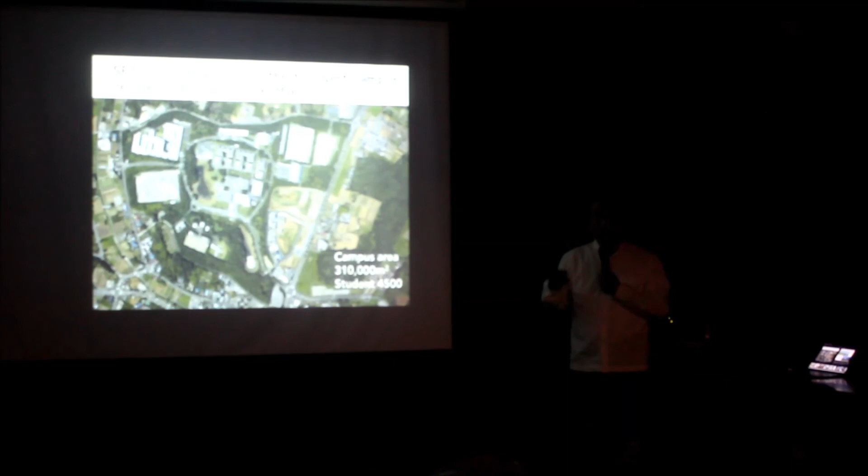Keio is very open to everything, especially our campus, Shonan Fujisawa Campus, SFC, which is quite open to the world. We set this new campus as a sort of global gateway of our Keio. This campus was designed by Fumihiko Maki in 1990, so 27 years have passed. Now we are constructing a new extension—I did not show this today because there are so many slides—called the Student Built Campus, SBC. Our students design our campus building and construct it by ourselves, made in wood, just one story, that's why it's possible. It's very exciting because the students can really be involved in designing and constructing the building.

This is Maki's design, very modern with a lot of green space. It's very nice. We have the Faculty of Environment and Information Studies, the Faculty of Policy Management, and the Graduate School of Media and Governance. My field is environmental design—urbanism, ICT, global collaboration, and some innovative implementation. And this is me.

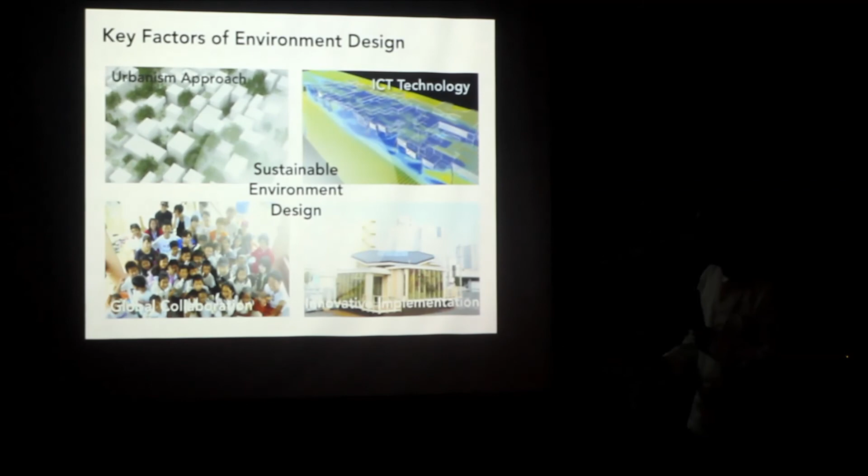I would like to introduce myself. This is Commerzbank in Frankfurt.

I was involved in designing this building under Norman Foster. It was a very exciting project. This is Tokyo-based Nikken Sekkei, a big design firm like SOM in Japan. I worked for this firm 8 years, and I was involved in Izumi Garden. Tokyo Midtown was designed by SOM—I'm representing SOM in Japan, so I was involved in this project. Our firm also designed a 10-story tenant building in Akasaka, hexagon shaped. These buildings are very exciting.

As I told you, many people are involved in one project, designing together, so collaboration is very important. But because of this complexity, we have to handle some part of the project. If you're responsible for your part and also cover other parts, maybe there's no problem. But these days, some people think, okay, this is my work, and from here it's your work, so I'm not interested in that part. That kind of attitude makes a big problem for the project.

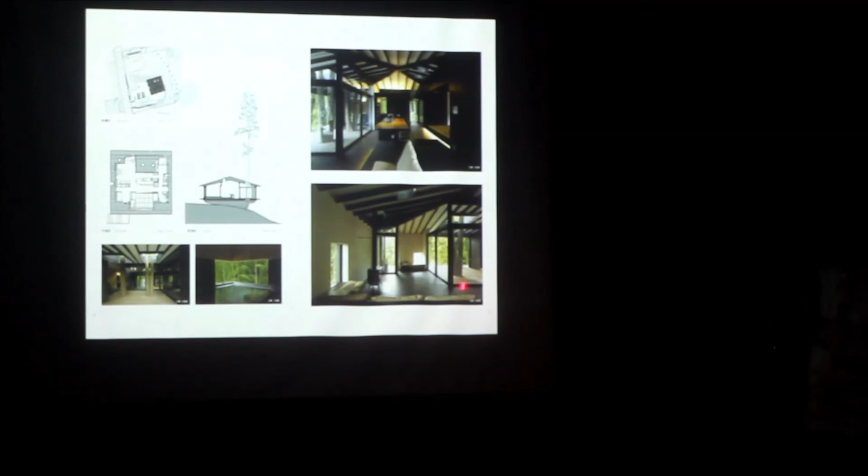Our firm also designed a small wooden weekend house. One guy bought the land, and they found the best location for the house had many trees standing there. They thought maybe they could cut the trees and put the house there. But we discussed with him that the reason people come here is to appreciate nature, so why not protect these trees? The idea is to live with the tree—so the tree penetrates the house. The plan became more complex because of the tree, but we really appreciate it. Living with nature is very important in Japan.

Six years ago, we had a big earthquake in northeast Japan. More than 20,000 people died or are still missing—a huge disaster. At that time, architects tried to help out the people there, but there was criticism of architects, because usually they get a commission, design, supervise construction, finish, and hand the building to the client. A year later, they come back and check—but people needed more help, even after completion or before design. So our team started getting involved in the community, trying to understand their needs, and trying to create a new building system to match their expectations.

At the same time, in Japan there's a particular way of understanding destruction. This is Ise Shrine, one of the oldest shrines in Japan. Very interestingly, they put a new building here, construct it, and keep it for 20 years, while there's vacant land next to it. After 20 years, they build a new building next to it and dismantle the old one, then keep that space open for 20 years. So every 20 years the building moves from here to here, and here, and here. But design-wise, it's exactly the same—the technology and process have stayed the same for more than 1,400 years.

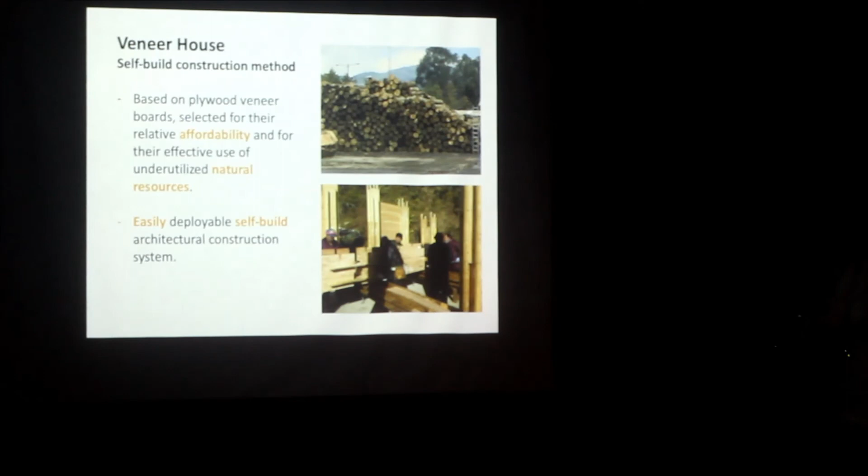At the same time, if we can introduce a self-built system, it's very helpful, especially for disaster situations, because in Tohoku, Northeast Japan, we couldn't get any carpenter. When we decided to build one community house, we waited half a year, but nobody came because everyone was occupied. So we decided to make a new system you can build by yourself - if so, you don't need a professional carpenter. So a self-built system is very helpful in that situation.

If we can use digital fabrication technology, that's also very helpful. Usually it takes forever to cut this by hand, and you need technique - that's why apprentices train under a carpenter for 5 or 7 years to do this. But if you learn how to use this machine for half a day, you can basically cut the same way. So we do not deny technology - we would like to introduce new technology, especially digital fabrication.

But most importantly, my point is that - shouldn't get closer, sorry, where's the microphone? Okay, there's a microphone, the speaker here. I should be careful.

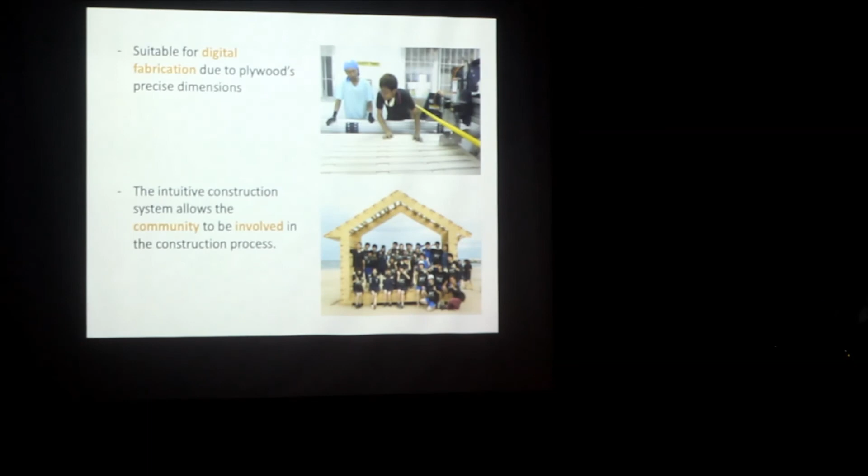Because of that heartbreaking situation, we would like to reconnect people of the society. That's why if the building process becomes that kind of moment, that would be fantastic. So we decided to use this moment to reconnect and reunite the community, the disaster-affected community. That is another purpose.

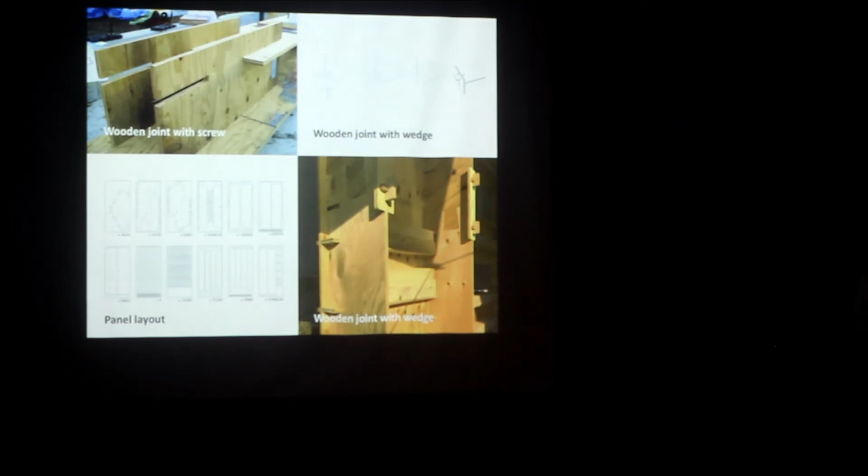So we introduced some systems to connect wood. One is cutting a notch like this and inserting the boards to make columns or beams. Another way is to use a wedge to insert and fix the joint. It's very traditional wooden joinery - we learn from the old wisdom and introduce it with new technology.

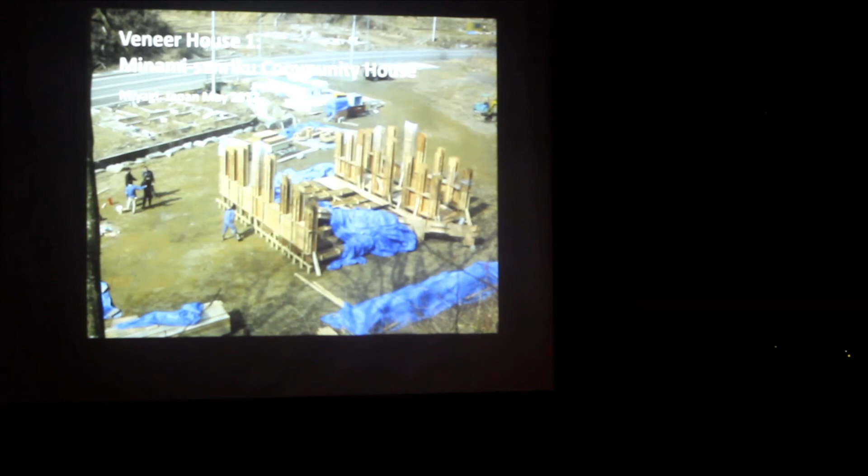The first project happened about 6 years ago - a community house, 100 square meters. We didn't have money, so we held a big party in Tokyo, and one night 900 people gathered, and we finally got $9,000 in one day. That was the biggest money I got in a day in my life. That's very nice, and students worked very hard within a very cold winter.

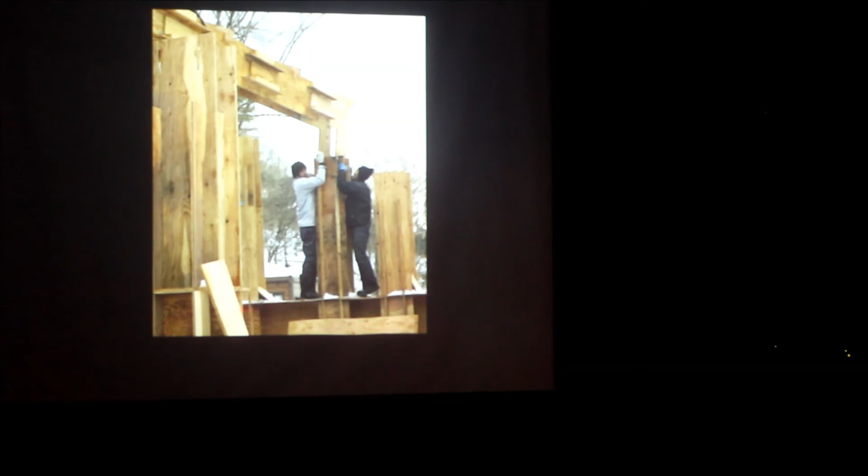Do you have snow here? No, right? You should experience this. Every weekend I went there, and we got frozen - we lost the sense of our fingers, both fingers and feet and hands. But they worked very hard, and basically we did not use much machinery - just one crane to put up the big beam.

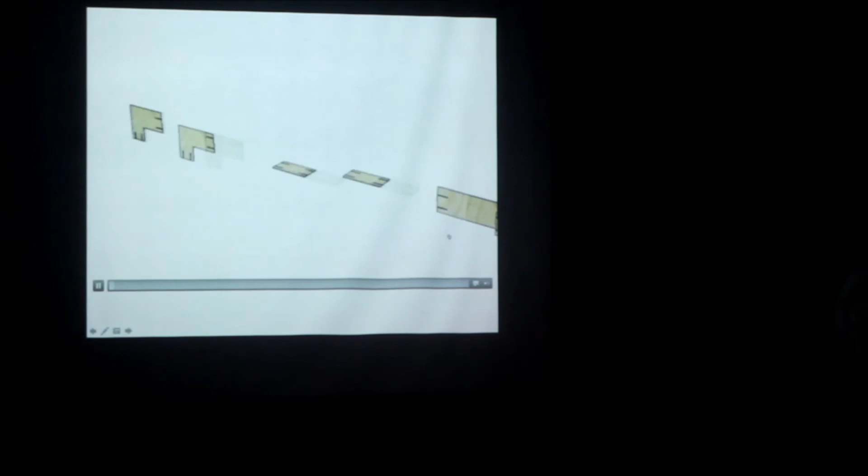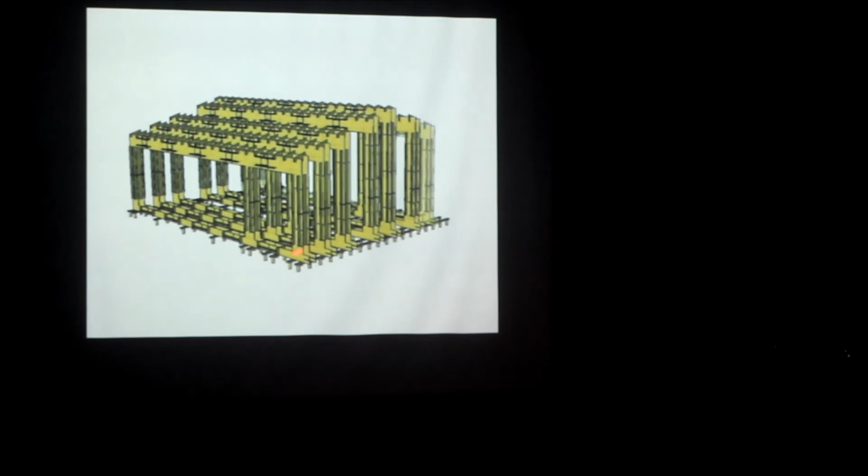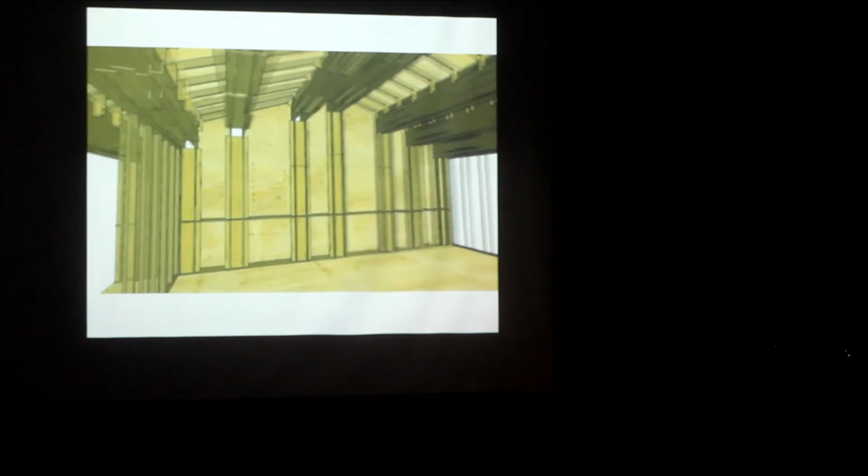So I can show you some of the process - maybe you can understand how to make this. These are the cut, pre-cut plywood, and pieces 1 through 5 all connected. This is the lower beam, and this whole project was all cut by hand - that's why there's some discrepancy, and you cannot put it together easily. But on top of the wooden foundation, we put all the structure there and connect it with the other beams, then we put in some floors - this is the actual photo where my students worked on this.

We also made doors from plywood, put in a deck, and added roof and insulation. This is the final day - it took about 2 months to finish this with the students, and on this last day they are so exhausted, but very happy.

I couldn't believe this situation—it's unbelievable. For our work, every weekend we go by night bus, Friday nights, coming back Sunday nights. We usually don't do that, but the situation there is much worse; you cannot go there. So we are very glad to work with local people and try to make a new community house for them.

We are very proud of my students, and they are very proud of themselves. So involvement and commitment is very important. This is the interior.

Because of the project, one NPO, Architecture for Humanity, which is American-based, contacted us and asked us to build another community house nearby—a fisherman's gathering space. So we decided to ask the fishermen this time to build this building, because once you can build by yourself, that would be better, of course.

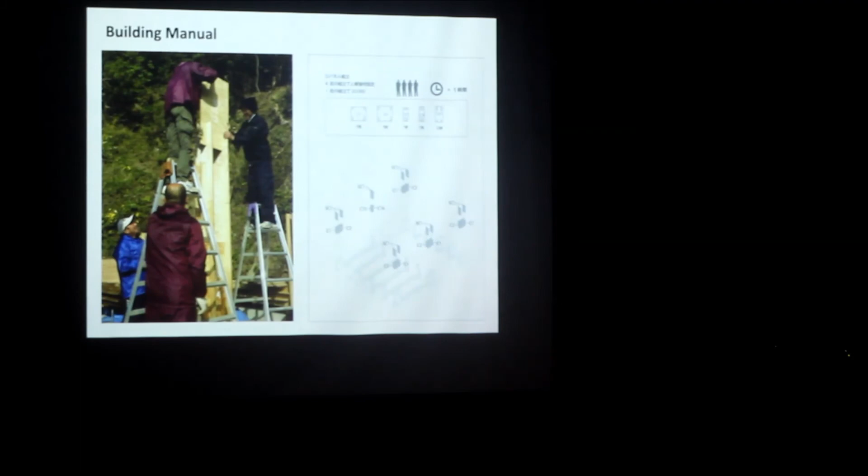The students can build, yes, that's good education. But if we build it and then give it to the users, they do not appreciate it so much. Of course they appreciate it, right? But if they can be involved, this becomes a one-to-one model, so they understand how to do it. It's easy, so they really were involved in construction.

This is two weeks' work, 40 square meters. Then we put in local bamboo woven material, because this type of hybrid is very important. The structure part, basically, we don't have to touch after we finish construction.

But the finish you have to change every maybe 7 or 8 years, and we cannot be there. That's why we should use local material—then they can maintain it themselves. And then we can also build local, light buildings.

So this is the boy. He came to the site every day. He didn't work at all, he just played. That's fine—already he was part of this project, right? And then even before the opening, he just occupied this window.

He's saying, you know, this is mine. This is very important for kids. If he can't get some place at home, he comes here every day and occupies this window—this is mine. Making his own space is very important. That's what I learned from this project.

This is the interior—something like a watermelon. On opening day, more than 50 or 60 people gathered, and we decided to take a photo. This is the balcony, and we didn't expect this many people on it.

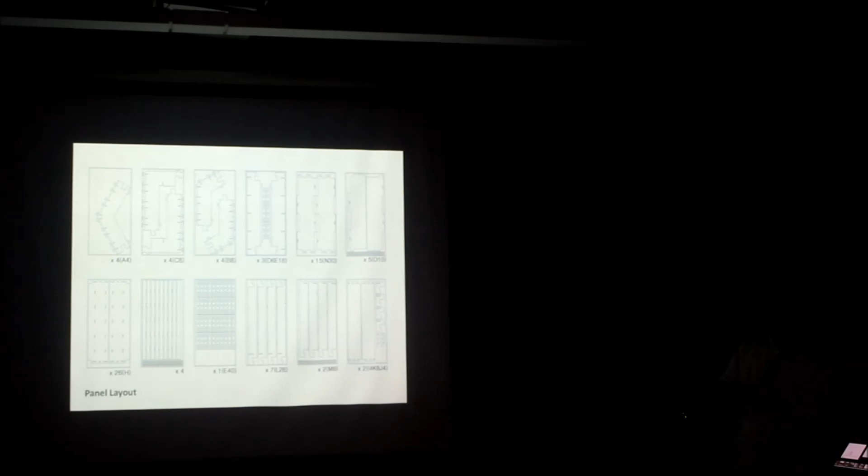So these are the layouts. We tried not to make too much waste, so these are pretty good. But here, there's some leftover piece, so we decided to make furniture using this triangle piece.

Then these are the joints, right? This is regular joinery, and we use a wedge here, right?

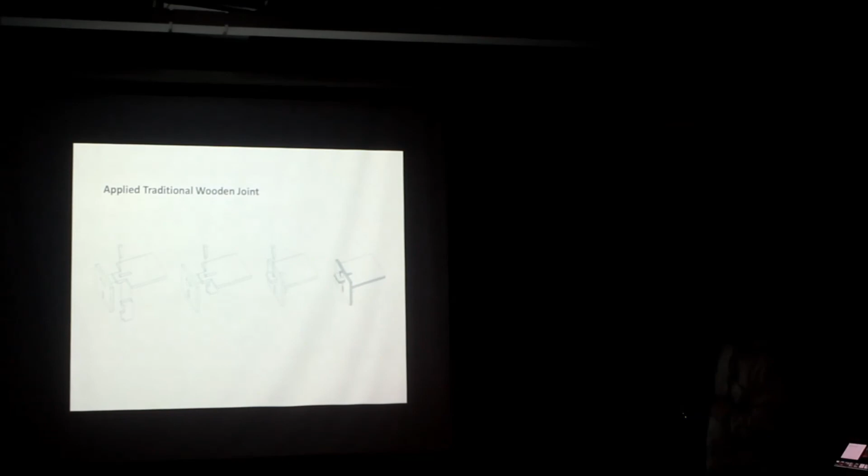Then we do the workshop again—this one younger, three years old. This is a daycare center, so the users are much younger. But we still use the same system and make a pen stand, and they make it too—so they sort of understood. Then we give some explanation, and they are so serious about it.

It's very nice, they are so serious. And they understood, definitely, at 3 years old. Right? So it's important for kids to really understand how to build a building.

Then we start to construct like this. This is the elementary school kids, and this is the actual part of the building. It's about 40 square meters, and many people came here and helped. So it took 2 days to complete the structure part in plywood.

But we put the substructure on top of that to put this bamboo finish. It took 7 days to put that substructure because we have to cut. The structure part we design and pre-cut, that's why only 2 days for construction. But then for local material we use, it takes more than 7 days.

So it's a pity because we try to make it shorter and more compact. That's why we found we have to think more about the interface between the local technology and our technology. And now it looks very local.

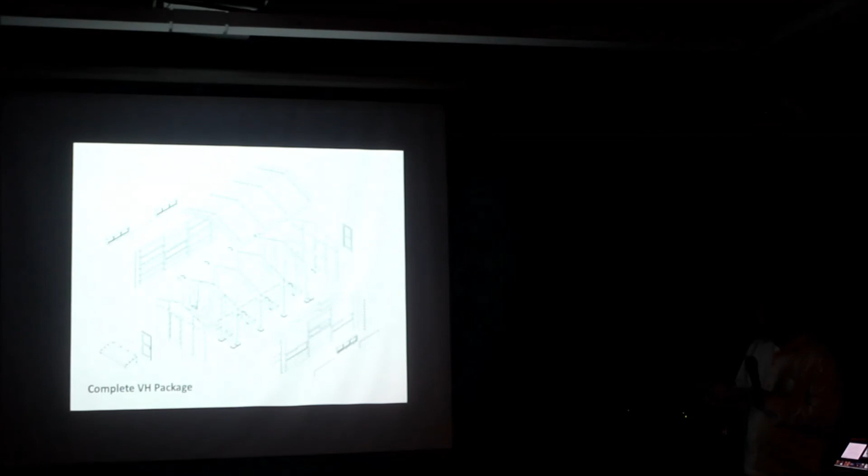Our first plan was to pre-cut the plywood in Japan, design everything in plywood, make a package, pre-cut it, put it into the container, and ship it to Nepal. That was my plan. In a 20-foot container, we could put 7 houses because it's very compact — so we can provide 7 houses at once with a small container.

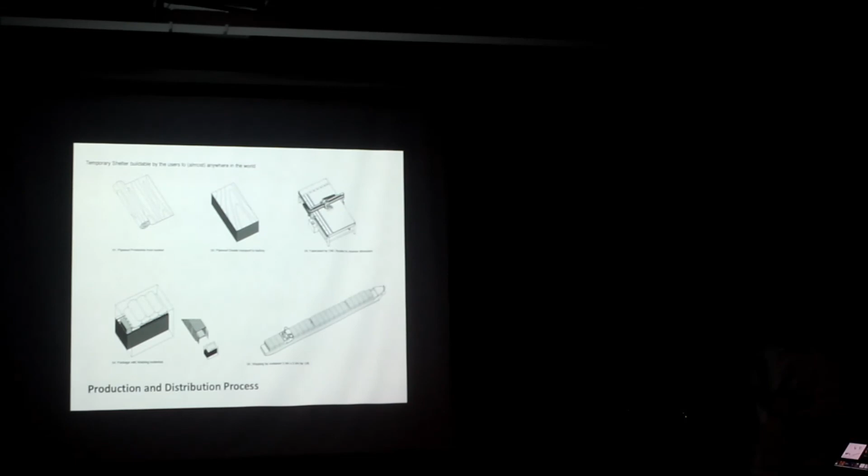But then we found that the border between India and Nepal at that time was closed — I think maybe with some political problems, 2 years ago. So nothing could pass the border. Also the situation was very hilly, the streets very narrow, and the roads very dangerous. So we gave up the idea of sending our material.

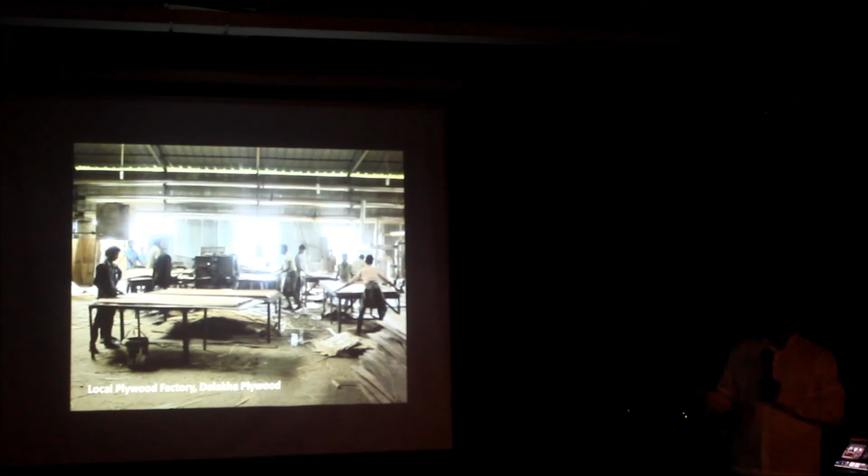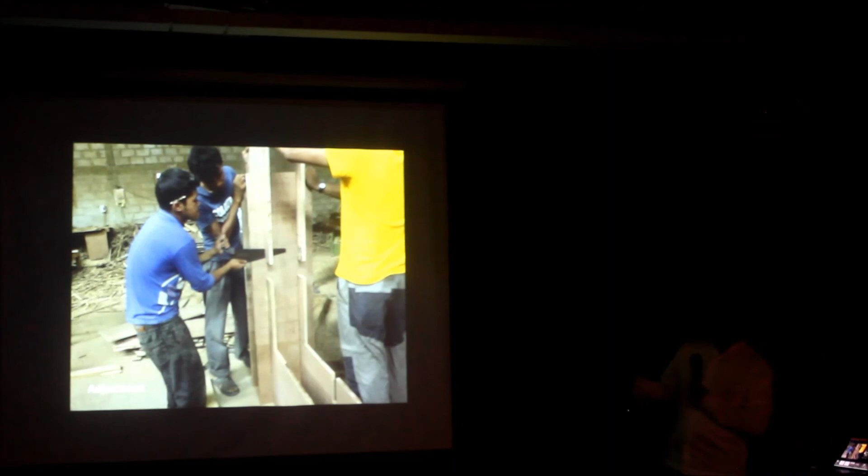Instead, we found a local plywood company that makes plywood by hand with quite good quality. They have a community forest, so they kindly offered us their factory to cut our pieces and assemble. So we used this space and worked with local people — this time, basically, we cut by hand.

So we go back to that original, very basic style. Once these guys, like 3 people, work from the beginning to the end, they know how to build this. Our idea is basically to convey our ideas on how to build a building, so they can build by themselves and spread that technique to other people.

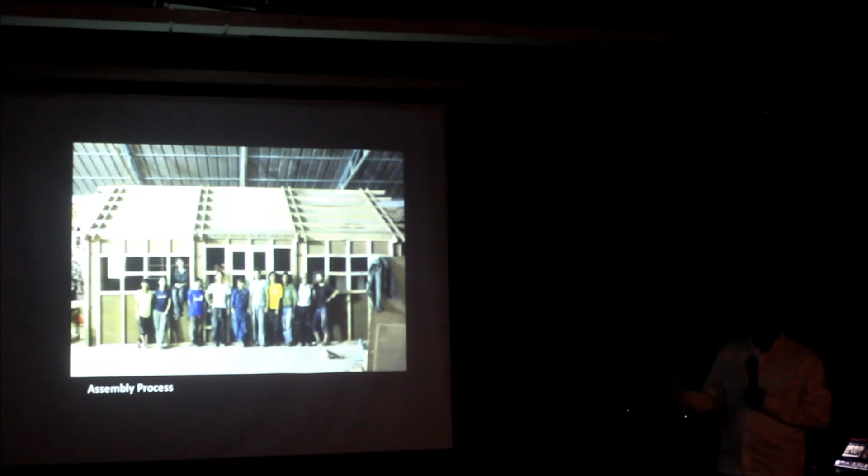We started to assemble this one, and completed the assembly. No nails yet, just assembly. Then we put all the pieces, dismantled them, moved to the site, and reassembled. This is the 3rd day at the site, so we assembled within 3 days and finished it.

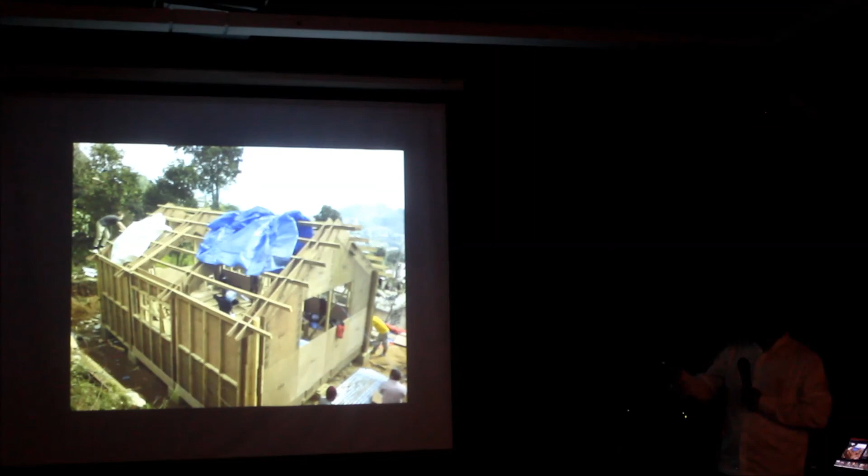This is a 24 square meter house, a model house. Now one family is living here. It's made of wood, maybe the first wooden building of its kind in Dolakha in the States.

Our intention is to make a small 3-bedroom house with plywood and shelves. This is the partition. It's a very small house, but we're very glad that one family is now living here, and he's a journalist who can report on us.

The beauty is that traditional housing uses stone, brick, or concrete, which is very heavy. But in terms of earthquakes, heavy architecture actually isn't so safe. Light architecture like this is much stronger against seismic load.

Going back to Japan, we designed a beach house for a beach that was washed away 6 years ago by tsunami. They wanted to reopen the beach, so we provided a stage for concerts and kiosks for selling beverages.

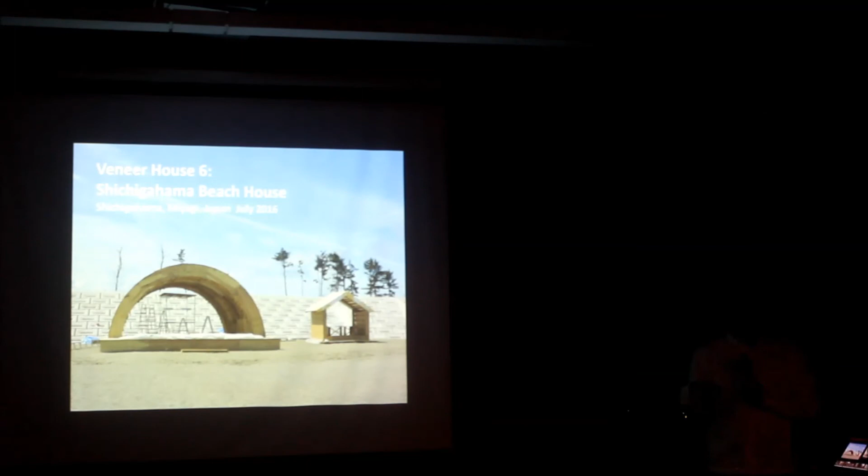Last year, at the beginning of July, I got a phone call, and they wanted something like this. So we started to design, asked the manufacturer to cut the pieces, and then constructed it. Finished on July 29th, so from design to finish was about 3 and a half weeks.

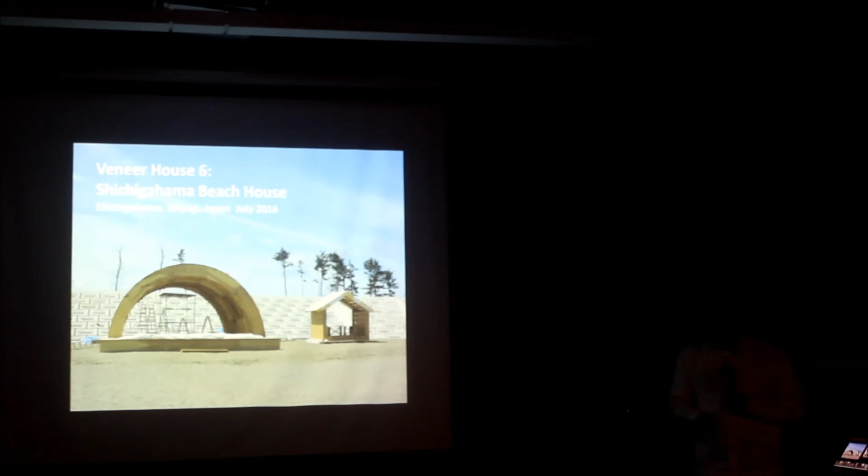That was the fastest, it was crazy. We were so tired, and the students were so exhausted. But then we completed this system.

To do that, we had to invent a new joinery system that doesn't have a knot here. Usually a joinery system has a knot here, right? But this one, because of the peg and the way it stops in the middle of the board, we can make a flush finish. Because of that, we can put the membrane on top. If you have a knot like this, you cannot put that membrane. So this flush joint works pretty well for this type of building.

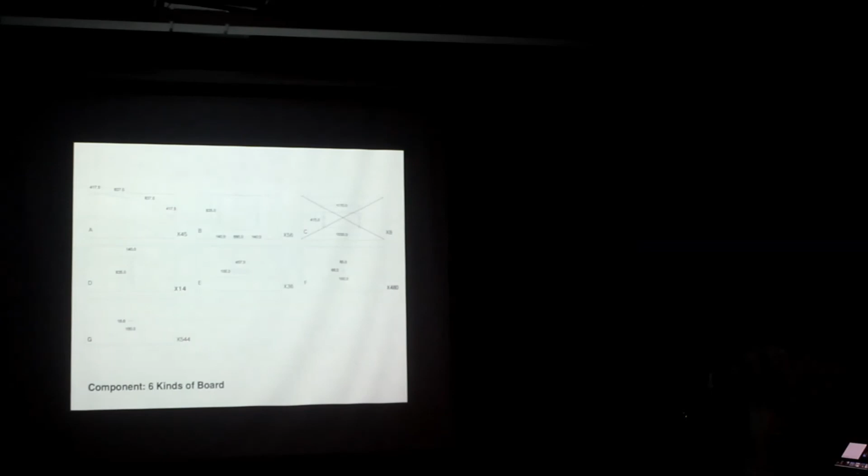The beauty of this building is that, for our first building, we had more than 100 kinds of pieces, and we made many mistakes because they were very similar. For this one, which is just 6 square meters, only 6 kinds of pieces make the building. It's very simple, so if some part is damaged, you can replace it with these pieces. You can just cut some pieces and keep them stocked in a warehouse, because you can repeat these. Repetition really makes things very simple.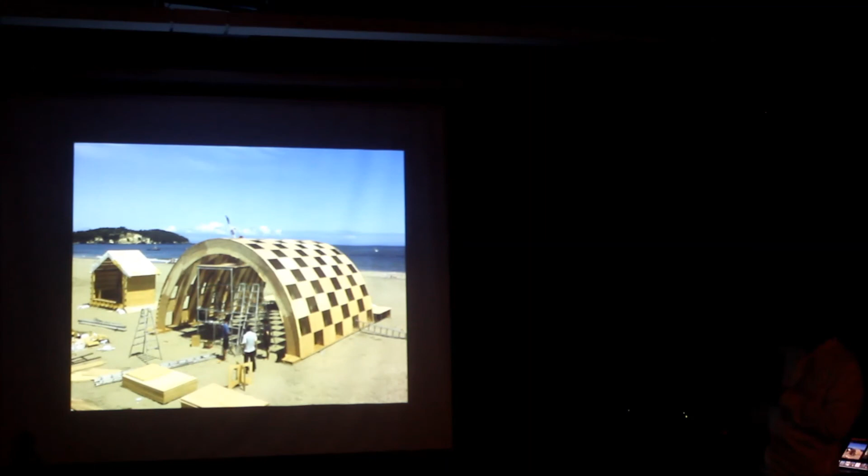Then we put the membrane on top and made a stage. Here's the crazy day they are enjoying concerts. It's a very happy moment because after 6 years, finally they could reopen the beach. High school students also assembled the kiosks there, and they really enjoyed it.

These students came back this year too, and built more. Now we have a total of 11 kiosks selling things. So high school students are also welcome to be involved in this project.

After this, one guy contacted us and said that in summer, people at the beach have summer houses only for 2 months. But when they disassemble the beach house, the carpenters throw all the nails onto the beach and go back. So you can find tons of nails in the fall, and it's very dangerous.

That's why one NPO that cleans the beach asked us to design a non-nail cleaning house. If we don't use nails or screws, of course it's safer. So this is a non-nail beach house.

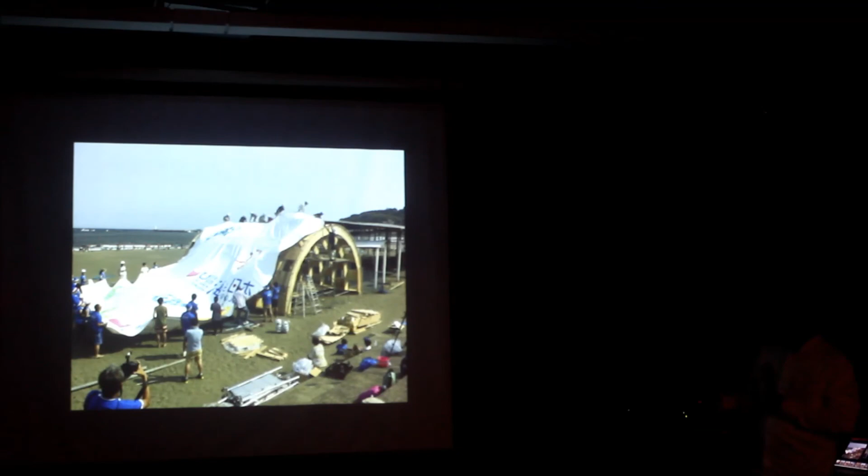There's a small house inside, and this one was dismantled last week. So next year, at the beginning of summer, they assemble it again, keep it for two months, and then dismantle it again. So it lasts maybe 4 or 5 years.

Fortunately, this beach is the venue for the Olympic Games 2020 in Japan for yachting, so this can be a sort of building which can be seen on TV.

We went to Croatia just last year to make this one, which is the only wooden building on this island. My idea is that, as you know, in Europe now they have a lot of immigrants from the South, from Africa, from Syria, but they have problems providing houses for them. So the idea is to provide a very simple temporary refugee house, an immigrant's house.

This time, Milano Politecnico helped us—that's why they provided plywood for us. So we used the plywood, and then we moved to...

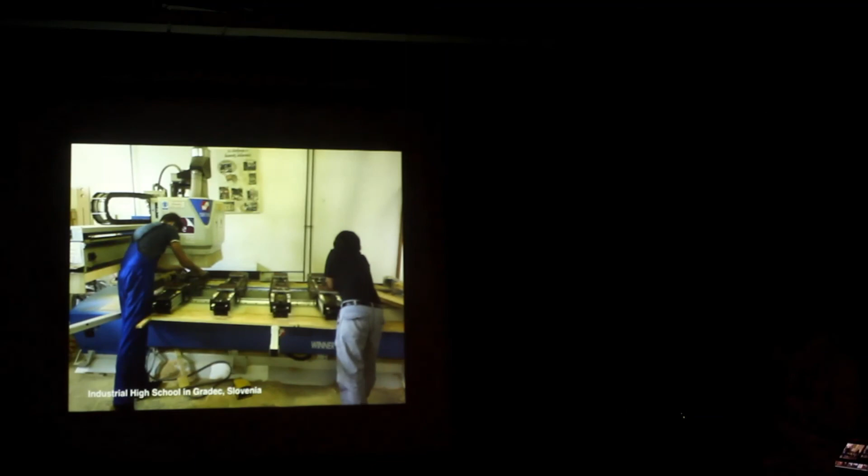That is our idea. So this is our trial, and here's the CNC router. We cut it, and then we provided the house—a very small 16 square meter tea house.

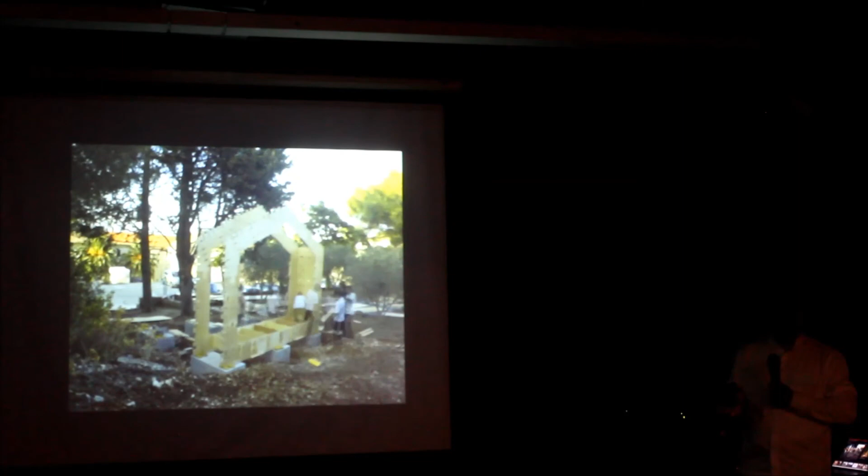The mayor wanted to introduce some Japanese culture—he's a judo player, and Croatia is very, very strong in judo. So he wanted to introduce some Japanese culture.

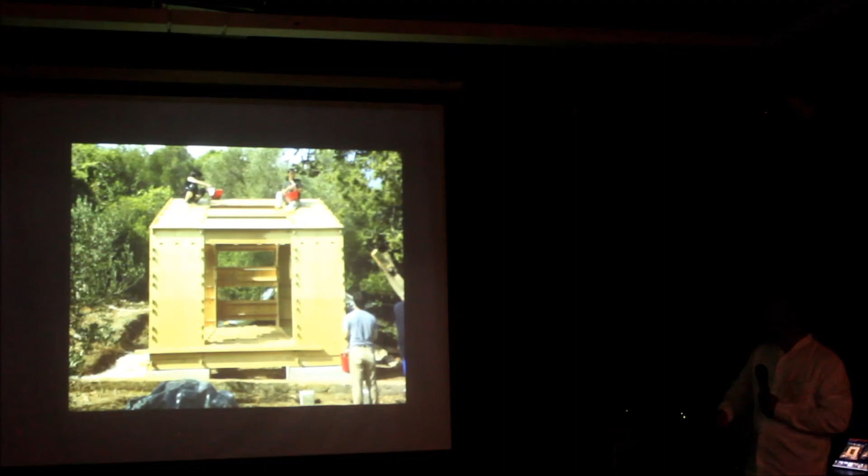So our intention was to provide a sort of prototype of a small house, and we made this one into a tea house. This is the structure, but eventually we had a tea house like this.

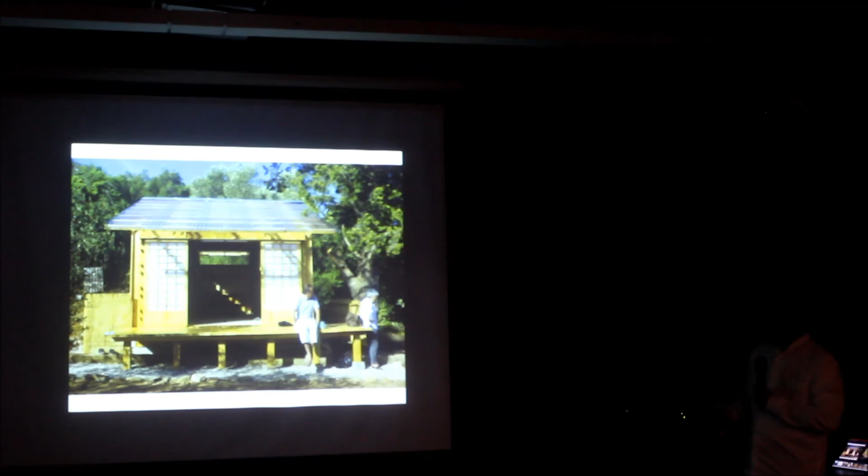I brought the paper myself from Japan because we couldn't get paper there. This is a very Japanese sort of tea house—we are providing tea, and it's very tough. So it's a tea house.

I'm old enough to just survive, but you guys, be careful and also be prepared, please. So I try to be involved in this type of situation and try to help out, but with some new ideas.

This is Kumamoto, southern Japan. An earthquake happened, and people actually cannot live there, but they cannot leave their house behind because all their belongings are there, so they have to stay nearby.

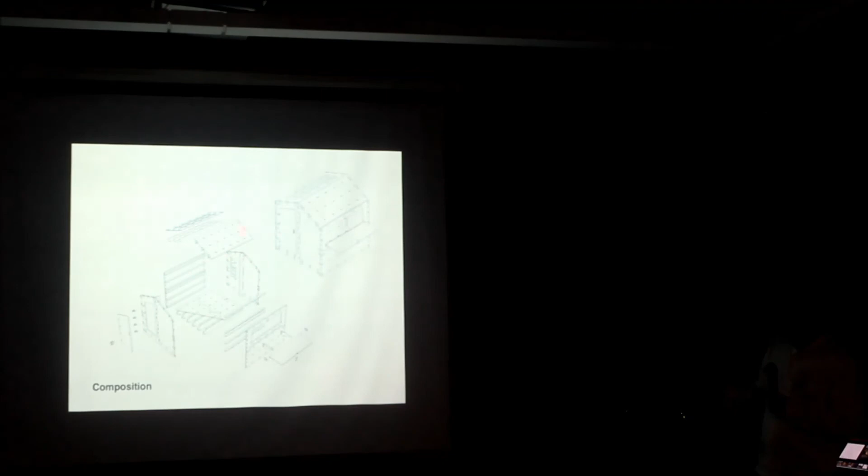So our idea is to provide a small house instead of a camping tent. The tent, of course, works, but it's very hard to stay in. So our idea is to provide a very simple plywood house, about 6 square meters, made of 18 boards. Here's the one.

This is less than 10 square meters, so we don't need any permission from the government. That's also why we put casters here—this is not architecture. So the government says, okay, you can just use it. This is a simple one, and 3 people can safely stay and sleep here.

Then another way of using it is as a vendor or like a tea house. So we are now pursuing this direction—a smaller, simpler construction veneer house.

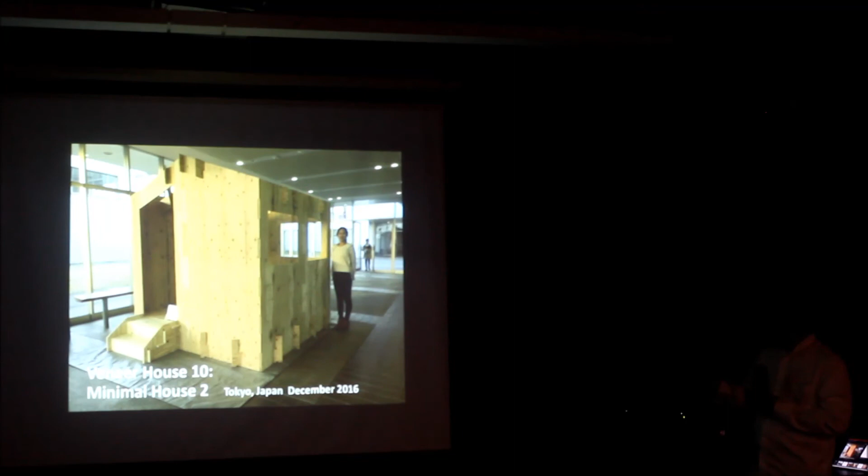This is the second version, which is much simpler, because for this one we don't even use a wedge. We provide a structure at the bottom, push the wall into the structure, then put the top structure on—then it's fixed. Here's the layout: total 14 sheets, 4 by 8 feet.

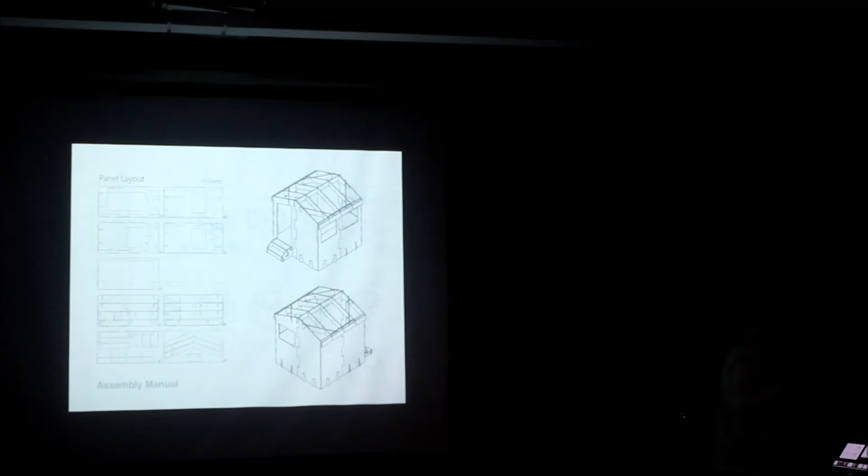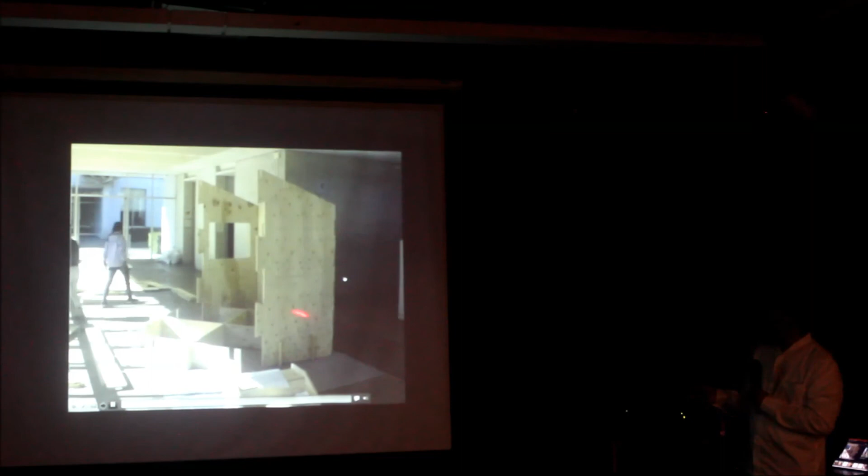Here is the manual we provided. It takes about 45 minutes to construct. First we put the structure here, diagonal, and then put this wall into that structure, then the floor here, and then the ceiling structure. Then we put the membrane and tighten it, so everything's fixed. It's 14 boards. In Japan, the material cost is about $500 US dollars, and it takes 45 minutes.

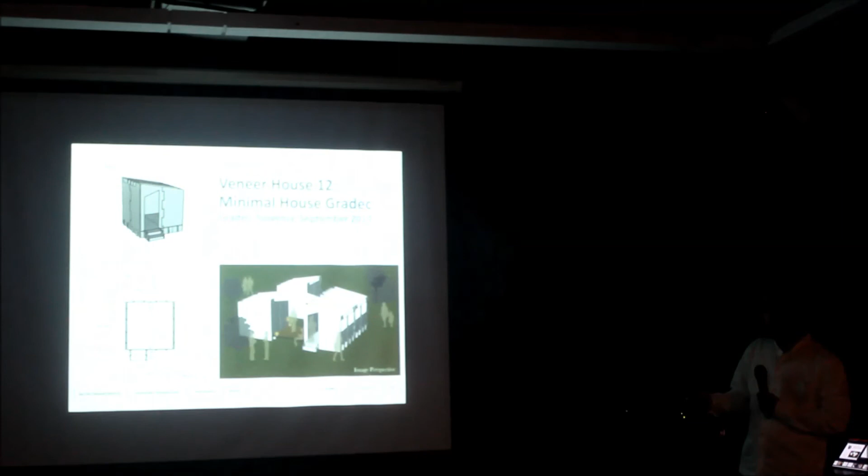So it's very simple. We are now providing a house like this in Slovenia for immigrants. In this case we are trying to make 3 booths: 1, 2, 3, where 2 are connected and 1 is separated. We can make a sort of space in between.

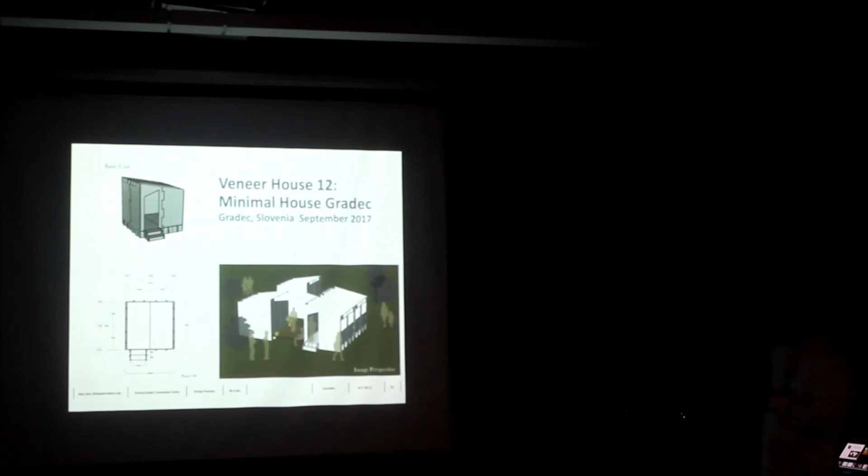Here's the 1 to 10 model, and these are the pieces. It's very simple, and finishes like this.

Again, if you are involved in this type of project, you can feel that architecture can be much simpler. Of course, you can go to more complex work after that, but at the same time, anytime you can come back to the simplicity. It's like Mac computer—Steve Jobs said, think different. He wanted to return to that world with a very simple idea.

So I would like to think about architecture again—maybe a lot of complexity, many things you have to learn. But you can also think very simply, and try to make the distance between the architecture and you smaller.

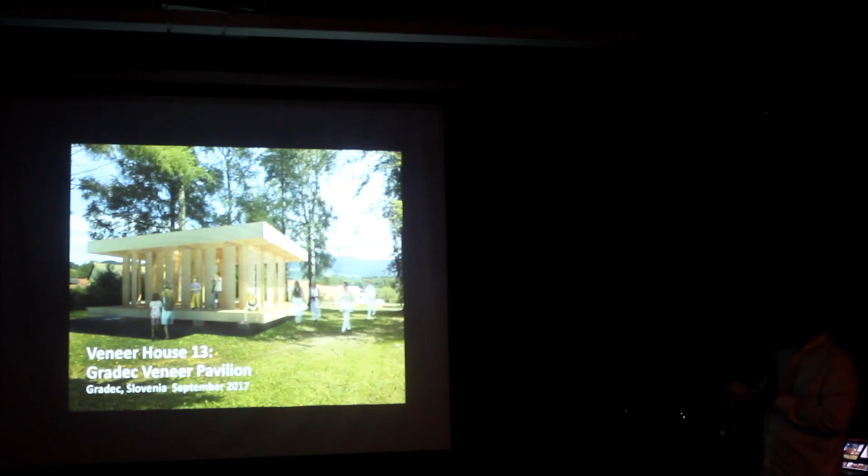So we are now building this building in Slovenia, under construction. This year we decided to build a small refugee house and also a community house in Slovenia for Gradec. Here it's more like a Mies van der Rohe type—a flat surface, very translucent, transparent space in between. The system is a square with 12 columns, and you can have open space inside.

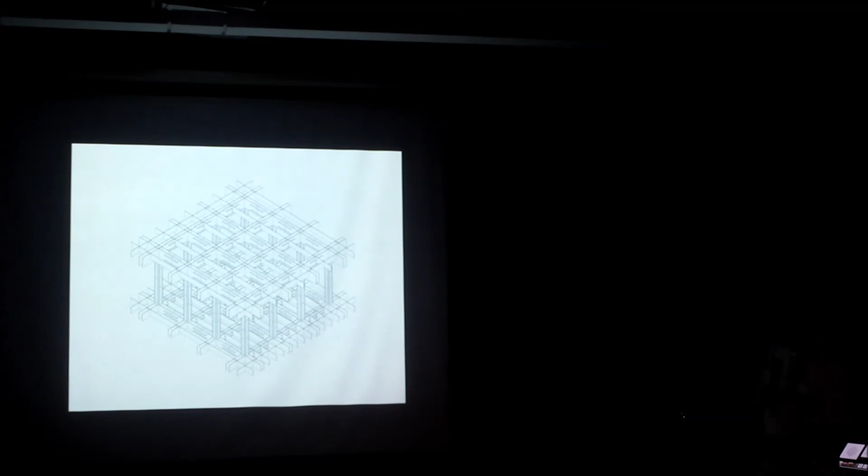This is from 4 days ago, and I go back after India. I go back to the site and work on this project, and it will be completed September 16th.

So we are now working in several places. Started from Japan, of course, but then other places. This year we go to Accumoli near Amatrice in Italy—they had an earthquake again last year. Also, even in the States we may have projects because there are many homeless people there. That's another issue, but they need houses. So a simple house can be helpful for a lot of people.

That's the last. Thank you very much.

Does anybody have any questions?

I have a question to ask you. What has the shift been like for you, moving from really large projects which you worked on with Norman Foster or Nikken Sekkei, or later with SOM? It's a kind of big, bad world of construction, right? And then you move to a scale which is very intimate and personal in some sense. Why this choice to shift to something smaller, and what has that journey been like for you?

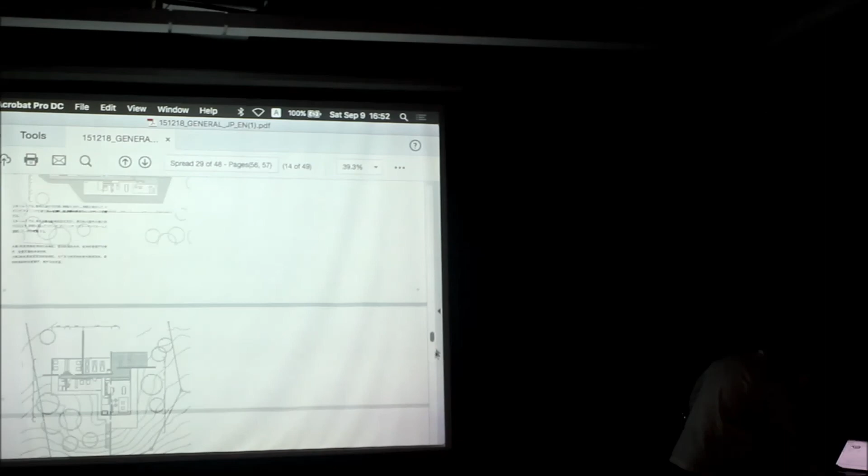Same technology, yes. I think maybe I can show - I don't know if I can find it quickly, but for example this is our portfolio, and I think maybe you can see - sorry, okay not this one. We actually designed some buildings, like a multi-story building.

Yes, it's very nice if we can build the building in wood. In the case of Japan, we have some regulation that if you have 2-hour fire-rated wood, you can build a 14-story building. So we designed a 14-story building at some point - I'm just not finding that one right now.

I don't know if I can find this. Anyway, maybe later I can show you, but that is possible.

Now we have that kind of non-flammable wood technology, which is very new. About 10 years ago, one architect actually invented it. With that technology, we can introduce wood buildings even in the center part of Tokyo, which we can pursue.

I talked with Kengo Kuma, the architect, and he is very good at using wood. We discussed that maybe for the Olympic Games, for the athlete camp, we could build a wood building, and we agreed we should do that. Then he got the big commission, and we forget that part.